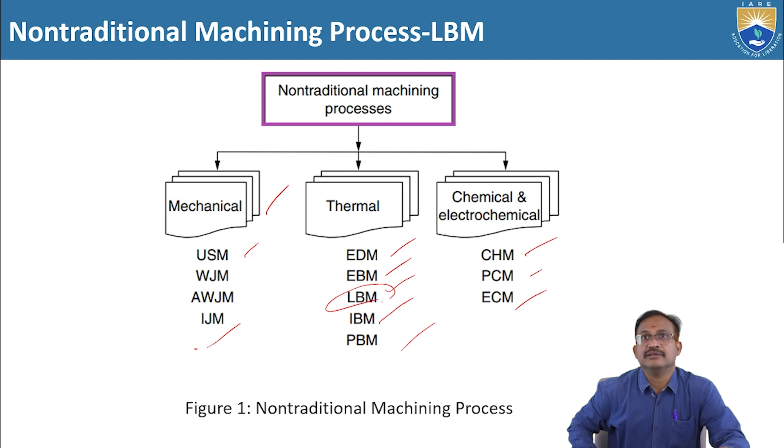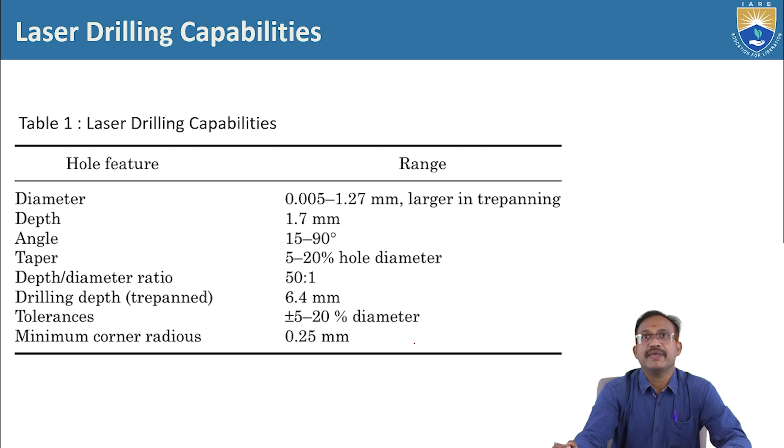Let us see the laser drilling capabilities. These are the hole features and the range for laser drilling: diameter 0.005 to 1.27 millimeters, larger in trepanning. Depth 1.7 mm, angle 15 to 90 degrees, taper 5 to 20% hole diameter, depth to diameter ratio 50:1, drilling depth for trepan is 6.4 mm. Tolerances plus or minus 5 to 20% diameter, minimum corner radius 0.25 mm. These are the parameters involved in laser drilling.

Now let us see the physics behind the quality of holes for laser drilled holes. Quality of holes in laser beam machining involves five major categories.

The first is working material, second is environment, third is laser pulse, and assist gas and focusing lens. Each category has subcategories. For working material: the type of working material, its surface reflectivity, and thickness of the workpiece material. For environment: the major parameters are humidity and temperature. These two influence the quality of the hole in laser beam machining.

Next, laser pulse parameters: pulse shape, frequency, wavelength, beam divergence, duration, energy, and transverse modes. These laser pulse parameters influence the quality of holes most predominantly.

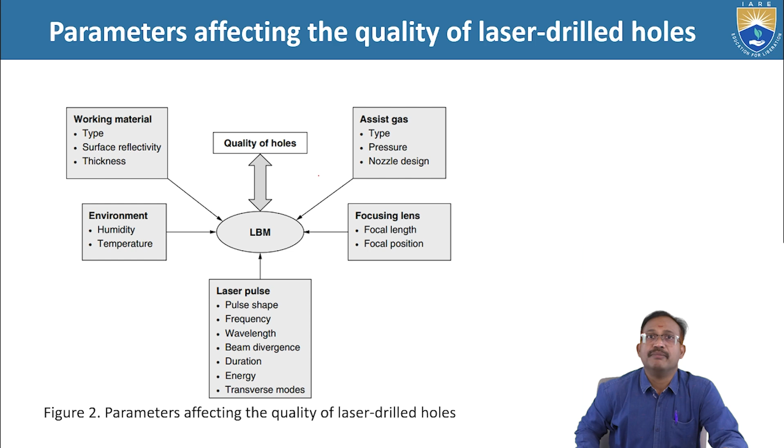Quality of hole is an important application for different organizations like medical devices or surgical units, and sometimes aeronautical parts and products, aerospace, and shipbuilding. There are so many applications of laser beam machining with holes. Hole making is very important, particularly for the medical field.

Importantly, pulse energy is an important parameter. It is recommended that the required peak power should be obtained by increasing the pulse energy while keeping the pulse duration constant. So pulse duration should be kept constant, and we have to increase the pulse energy. Next, drilling holes with longer pulses causes enlargement of the hole entrance.

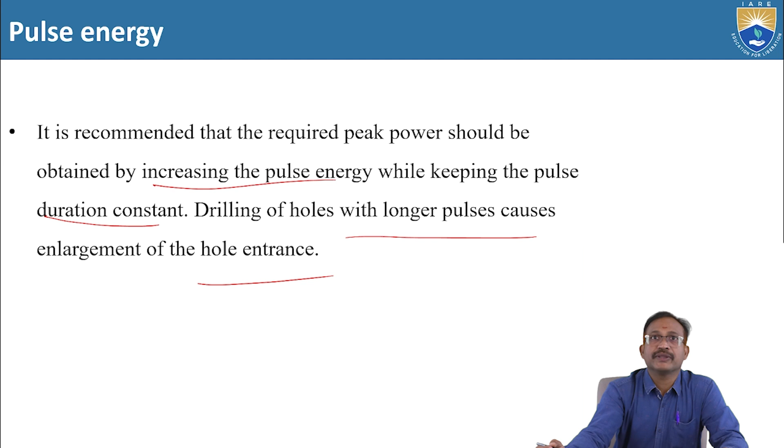Next, pulse duration. The range of pulse durations suitable for hole drilling is found to be from 0.1 to 2.5 milliseconds. The time duration is very less, 0.1 to 2.5 milliseconds. Make a note that here the units are in milliseconds.

Next, high pulse energy, that is 20 joules, and short pulse duration are found suitable for deep hole drilling in aerospace materials. We have discussed that laser beam machining hole making is very important in medical and aerospace engineering. Drilling a hole is an important feature for flow and other functional elements in the medical and aeronautical fields. So we must take ultimate care towards the quality of hole making in these fields, and use laser beam machining particularly to achieve high efficiency and high accuracy.

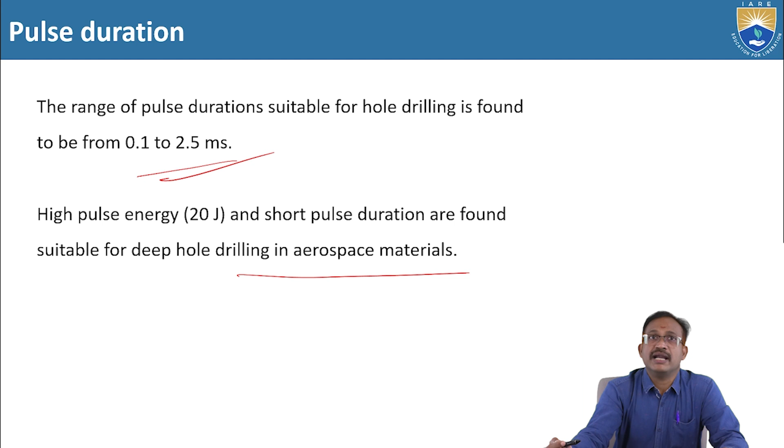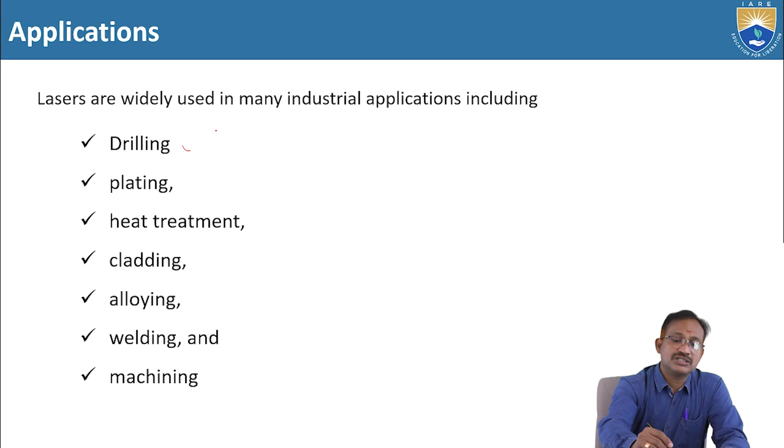Now let us see the applications involved in different areas for major and minor industries or fields. The first one is drilling. So now we are focusing particularly on drilling. The other applications are plating, heat treatment, cladding, alloying, welding, and machining.

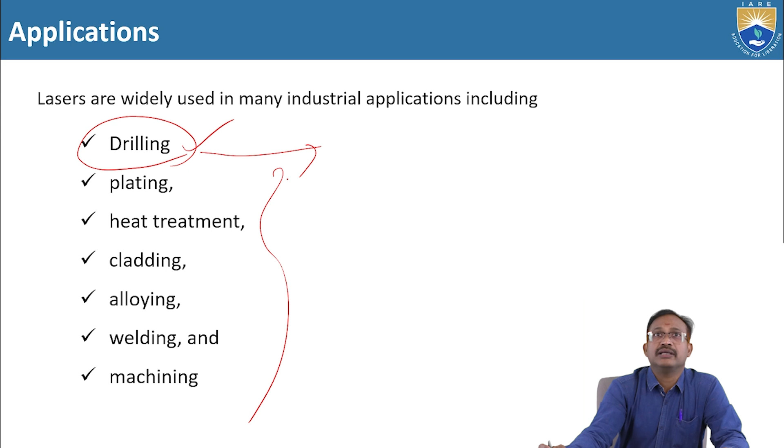Today let us confine to this drilling application. Right, what is drilling?

Composite materials and some exotic alloys have been widely used in the fabrication of both structural and non-structural members of the airframes and engines of aircrafts.

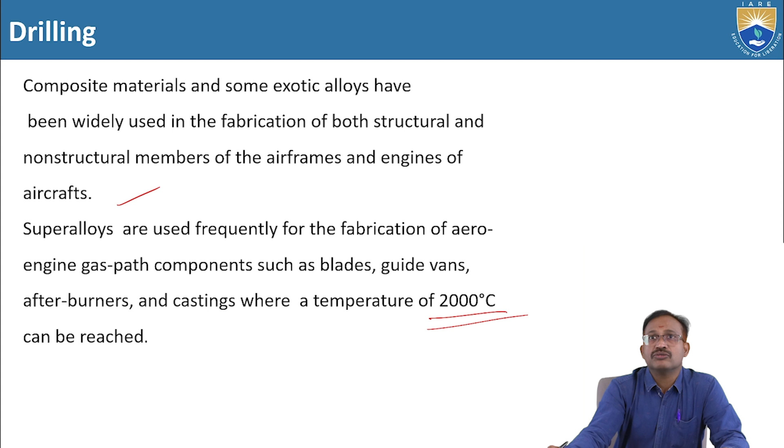Next, superalloys are used frequently for the fabrication of aero engine gas path components such as blades, guide vanes, afterburners, and castings where a temperature can be reached. So here the important point is the temperature is about 2000 degrees centigrade.

Advanced ceramics and titanium alloys are being developed and used. Such materials need advanced technologies in their fabrication and processing.

Titanium alloy is a very hard material that we cannot machine through conventional machining processes. It is very difficult to turn or even mill through our conventional lathe machines or milling machines. So we have to go with some unconventional machining process, particularly laser beam machining for machining titanium alloys.

Even for drilling titanium and other hard materials, laser beam machining is the very best choice. Conventional drilling and punching are found to be insufficient because of the material toughness and high strength. So here titanium alloy is a very tough and hard material.

Of course, some poor characteristics are also there for titanium. Though it has poor wear characteristics, it is very tough and hard. So for that we have to go with laser beam machining.

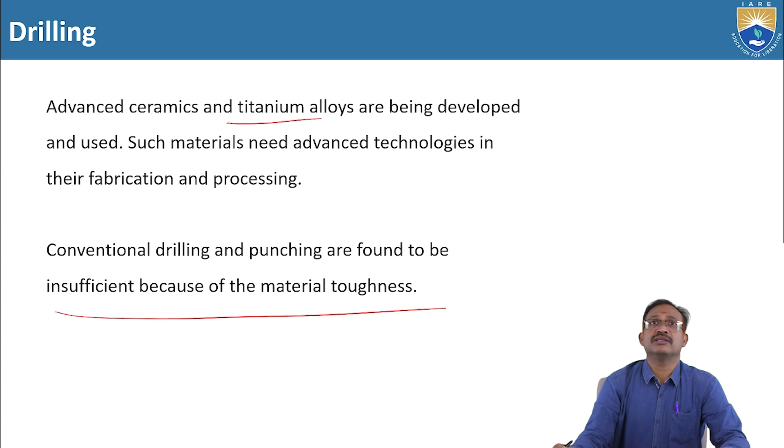Other nonconventional processes such as electrochemical machining, electrochemical drilling, EDM that is electro discharge machining, ultrasonic machining USM, water jet machining, and abrasive water jet machining suffer from the high cost of tools and long lead times.

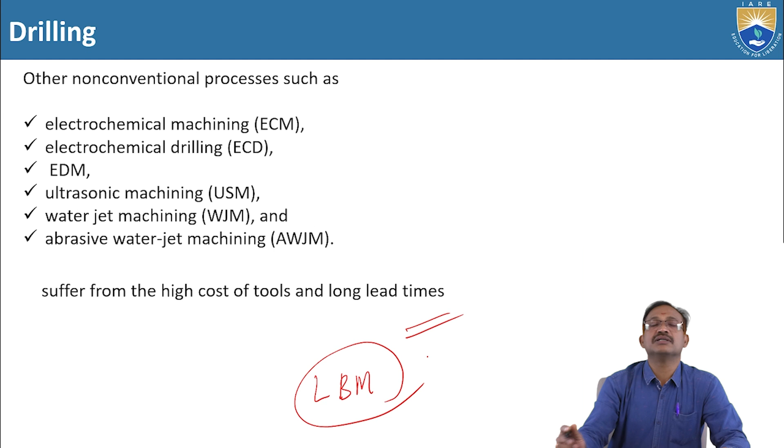So we have to go with laser beam machining so that it will be feasible for making holes through drilling. The capacity of laser beam machining to produce fine holes at high machining speeds compared to other machining processes is reviewed by Snoeys et al during 1986.

This Snoeys research found that laser beam machining is good in aspects like machining speed and cost effectiveness. So since the 1970s, laser drilling has proven to be an efficient drilling tool in terms of cost, quality, and reliability of large scale production applications.

Initially, establishing laser beam machining may be difficult in terms of expenditure and utility, but for large scale production applications, it is definitely very good in terms of cost effectiveness, and in terms of quality and reliability it is also very good.

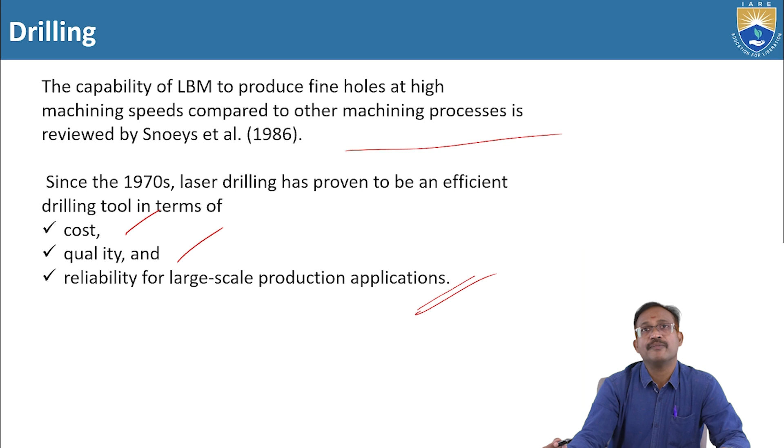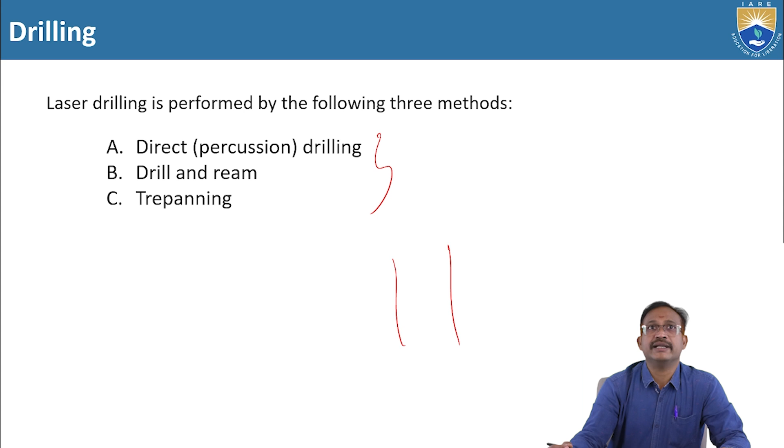Laser drilling is performed by the following three methods. About operations and manufacturing methods, drilling is extended like direct drilling, drill and ream, trepanning. Simply making a hole is drilling, but what are drill and ream, and trepanning?

Produce the required hole size by application of one or more focused laser pulses. The hole size is determined by the input power and the focusing adjustments. While most holes are drilled with a single laser pulse of high energy, it is more efficient to drill deep holes with multiple pulses of low energy.

This is just like our exercise. Instead of lifting more weight for a short interval of time, it is better to lift and lower lesser weights constantly for a longer time, which gives a better impact on the requirements. Similarly here, multiple pulses of low energy is the better choice for deep hole drilling.

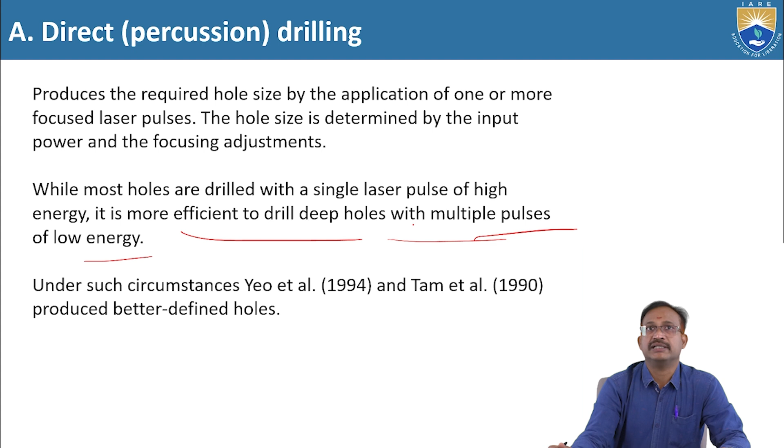Next, drill and ream consists of drilling a pilot hole and then changing the laser parameters by increasing the spot size to open out the hole to the required diameter. This is just like our conventional method of reaming, where first we make a normal drill hole, then later enlarge it to our requirement. That is nothing but reaming.

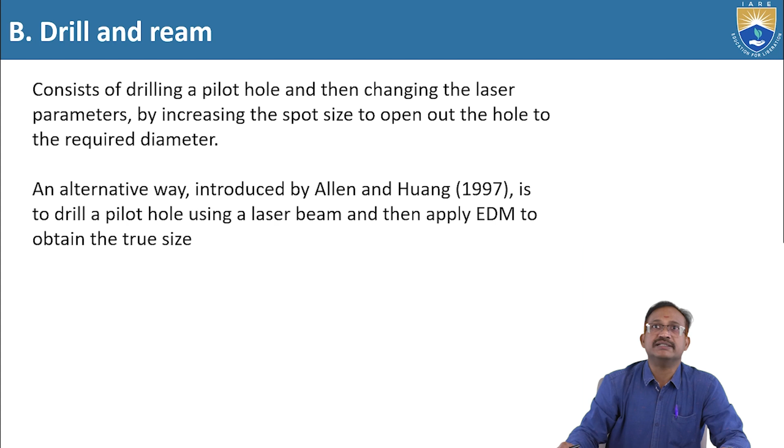Right, what is trepanning? It is used for large holes by either moving the part or rotating the laser beam delivery system or lens. Because of the low energy of each pulse, the recast layer and out-of-cylindricity are reduced.

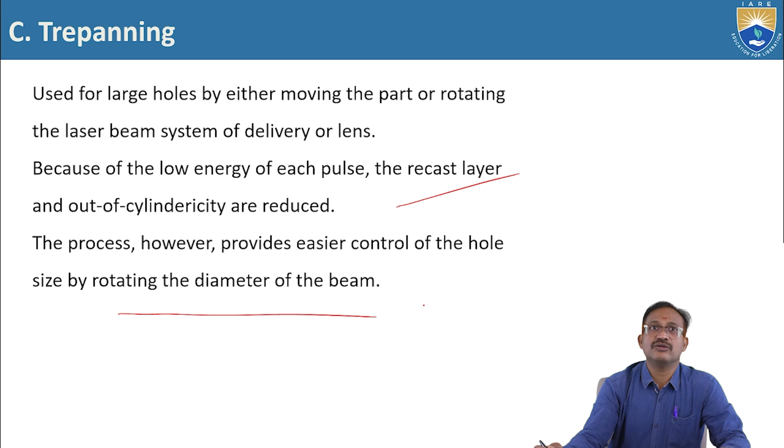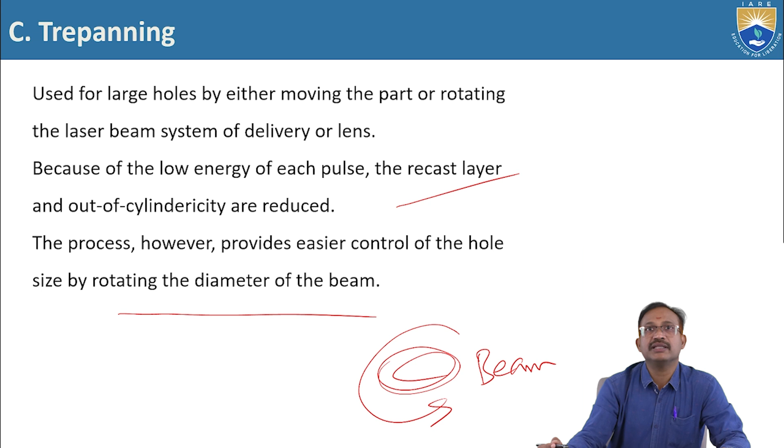Okay, so here what is happening? Low energy of each pulse, the recast layer and out of cylindricity are reduced. The process provides easier control of the hole size by rotating the diameter of the beam. So here we are rotating the diameter of the beam, not the workpiece, in order to make a hole - that is nothing but trepanning.

Next, hole quality characteristics - this is our main objective of today's topic: diameter and depth, taper and barreling, recast layer and micro cracking, entrance angle, drilling time. These are the parameters which influence the hole quality.

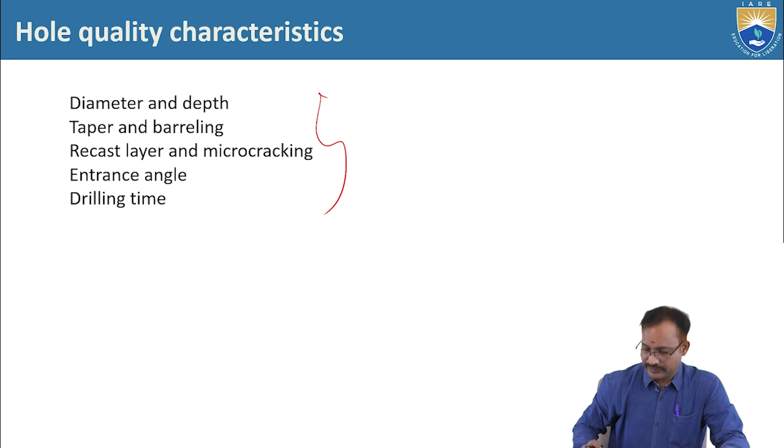Diameter and depth: using laser beam machining, it is economically effective to drill holes up to 1.5 mm in diameter. For large diameters, the trepanning method is recommended. So for larger diameter holes, usually we rotate the laser beam instead of rotating the workpiece - that is trepanning, which is also making a hole, but for larger diameter holes.

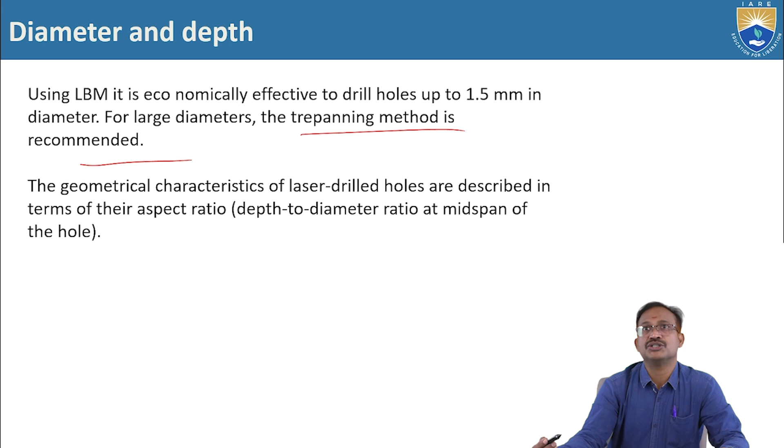The geometrical characteristics of laser drilled holes are described in terms of their aspect ratio, that is depth to diameter ratio at midspan of the hole. The aspect ratio depends on the optical characteristics of the beam and the optical and thermal properties of the material.

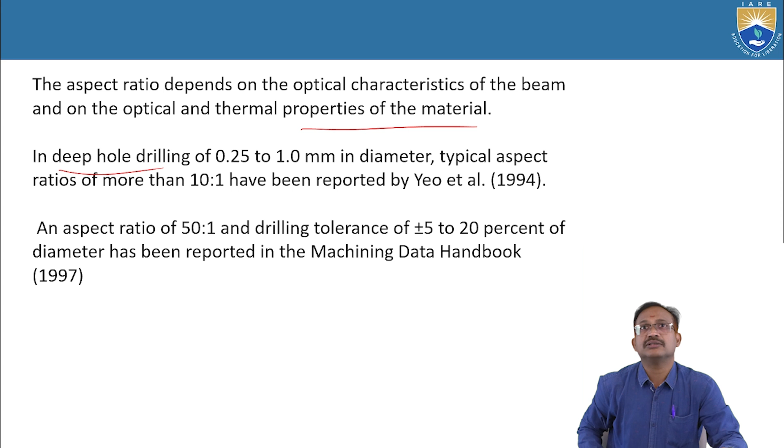Next, deep hole drilling. In deep hole drilling of 0.25 to 1.0 mm in diameter, typical aspect ratios of more than 10:1 have been reported by Yeo et al. during 1994. An aspect ratio of 50:1 and drilling tolerance of plus or minus 5 to 20% of diameter has been reported in the machining data handbook in 1997. So these are about the aspect ratios and tolerances of drilling a hole.

Next, taper and barreling. The degree of taper, which ranges from 5 to 20% of the hole diameter, decreases with an increase in the hole depth. The taper depends on the pulse duration and energy, number of pulses, and the design of the optical system. In general, the shorter the pulse duration, the greater the taper - so if we reduce the pulse duration, the taperness will increase.

According to Yeo et al., during 1994, barreling formed by the ejection of material from the local sites of the cavity can be reduced by decreasing the pressure of the assist gas.

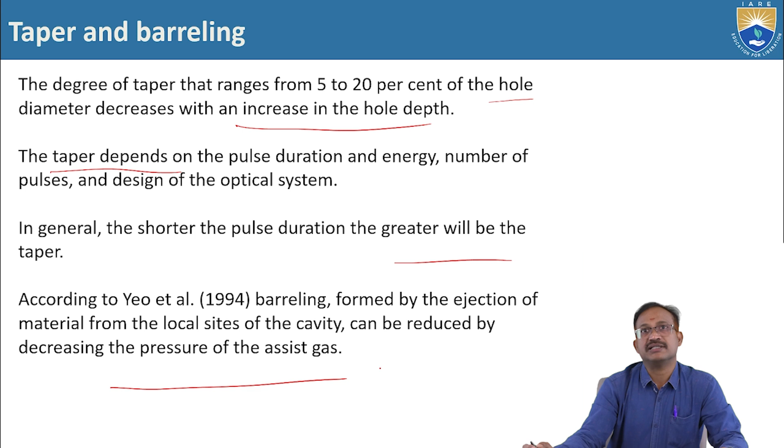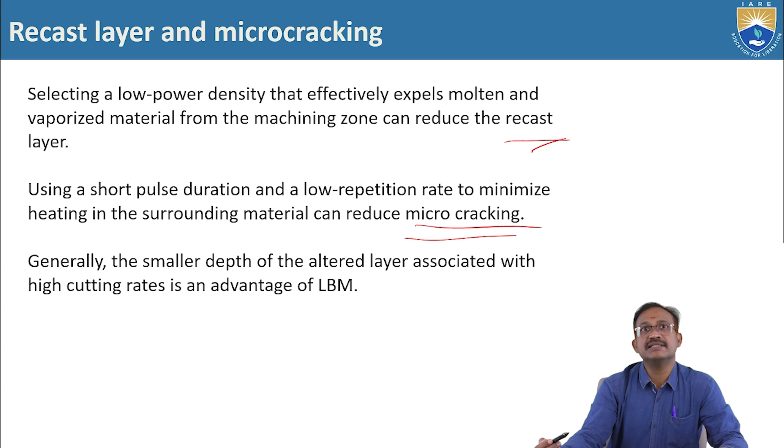Selecting a low power density that effectively expels molten and vaporized material from the machining zone can reduce the recast layer. Using a short pulse duration and a low repetition rate to minimize heating in the surrounding material can reduce micro cracking. These two - recast layer and micro cracking - majorly influence the quality of the hole. Generally, the smaller depth of the altered layer associated with high cutting rates is an advantage of laser beam machining.

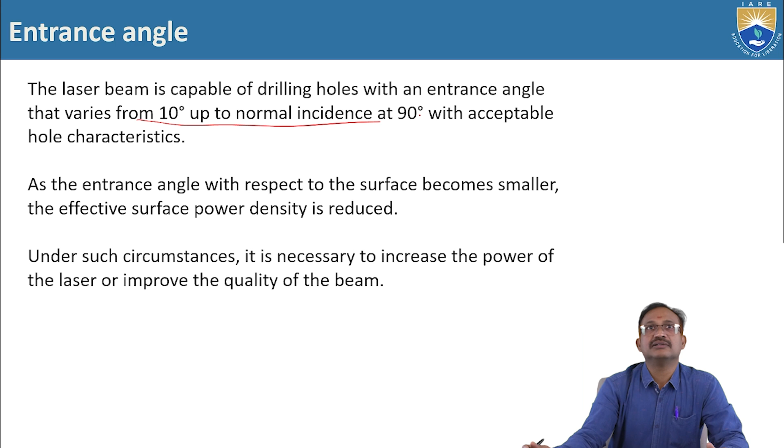Regarding entrance angle, the laser beam is capable of drilling holes with an entrance angle that varies from 10 degrees up to normal incidence at 90 degrees with acceptable hole characteristics. As the entrance angle with respect to surface becomes smaller, the effective surface power density is reduced. Under such circumstances, it is necessary to increase the power of the laser or improve the quality of the beam.

About drilling time: deep hole drilling up to 17 mm can be accomplished by operating the laser beam in the rapid pulse mode, so that the total time is proportional to the amount of energy delivered per pulse.